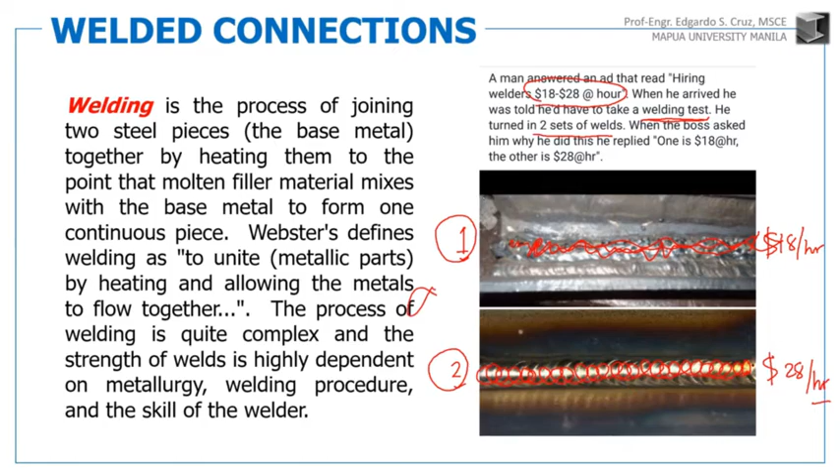We have different welding processes. The most common welding process that we adopt here in the Philippines is SMAW, Shielded Metal Arc Welding.

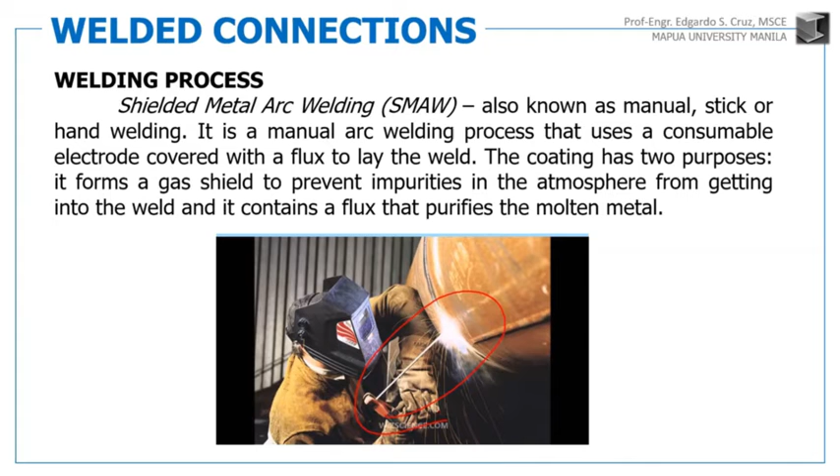This is the typical one with a welding rod. It's touched onto the base metal and it burns. The welding rod gets formed or converted into weld metal. So what we'll be analyzing later is the capacity of the weld metal, the burned electrode. The welding rod, that's the electrode. So when you touch it to the base metal, it cooks, it burns, and then it sticks onto the base metal. What sticks onto the base metal is called the weld metal. So the weld metal is what we analyze in terms of its strength.

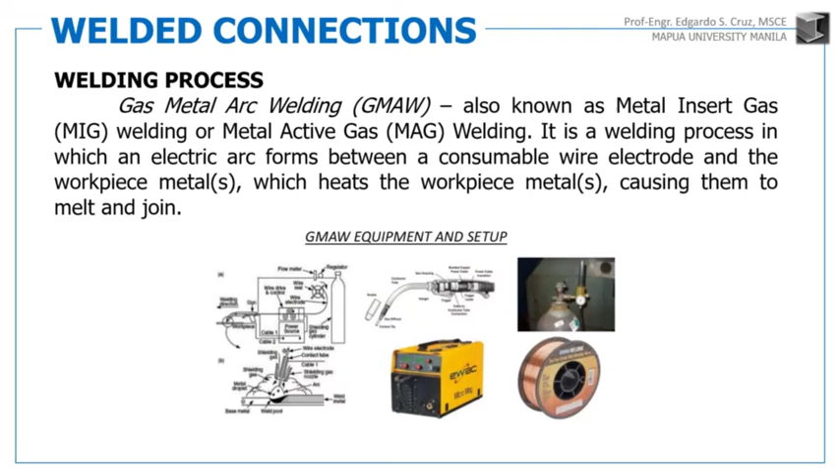Not to mention, we have other possible processes of welding. We have GMAW, gas metal arc welding, as well as flux core arc welding, and submerged arc welding, SAW. These different processes require higher technology in the welding process.

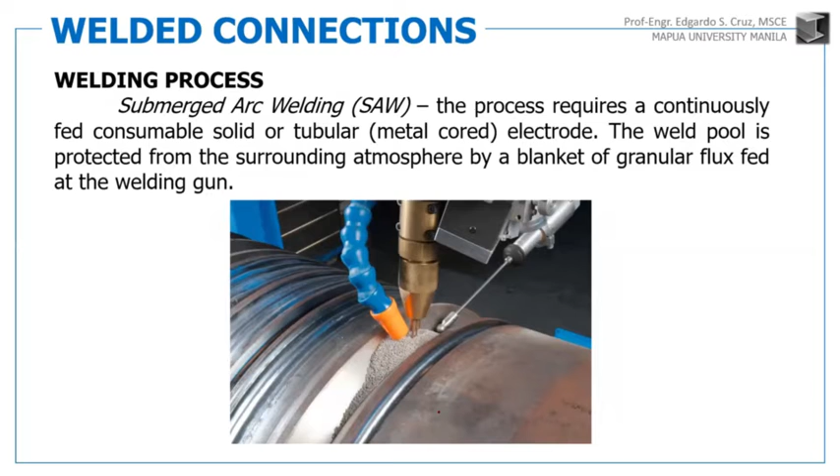If you want to convert that to megapascals, just multiply it by 6.9. That becomes the tensile strength of the electrode, of the weld metal. For E70, it's 70 KSI. For E80, it's 80 KSI.

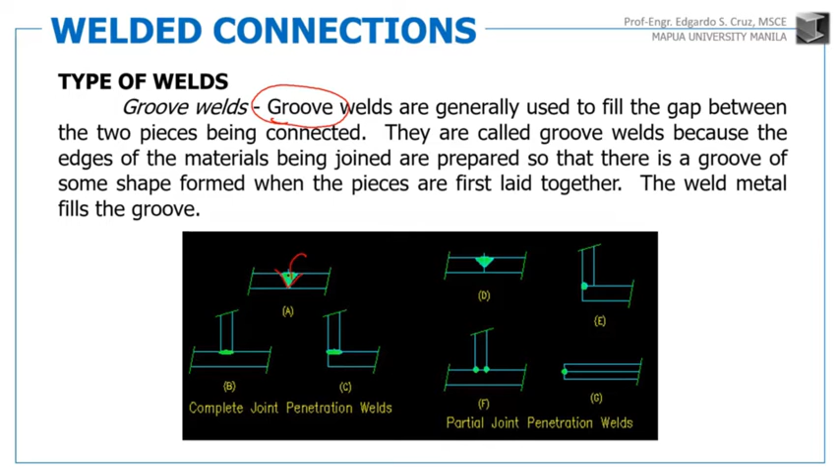But the most commonly used type of weld is the fillet weld, which usually isn't placed in a carved groove. It's typically placed at corners - it could be placed here, here, at the corner, or here.

So take note of the parts of the fillet weld. These are the parts of the fillet weld, take note of that.

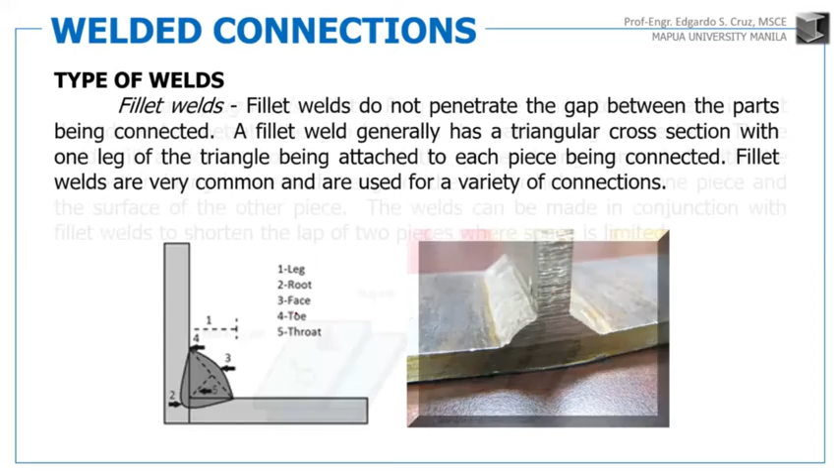We have slot and plug welds. These are done like you have a hole, then you fill in the hole with weld, so it becomes like a lock, like a shear key effect.

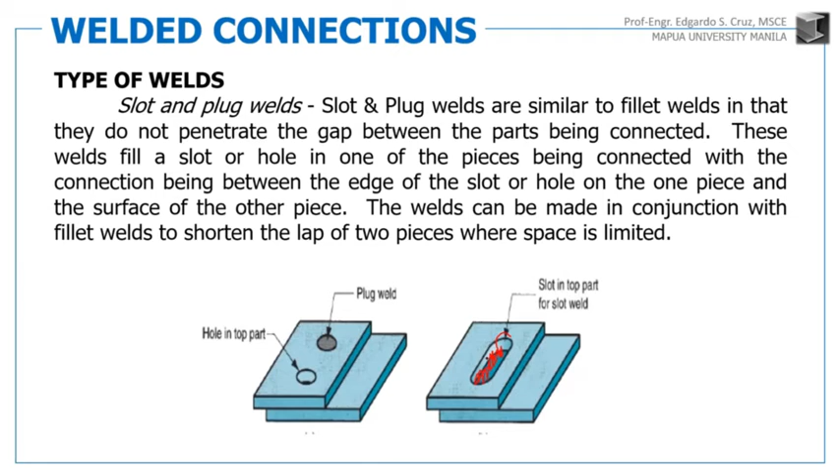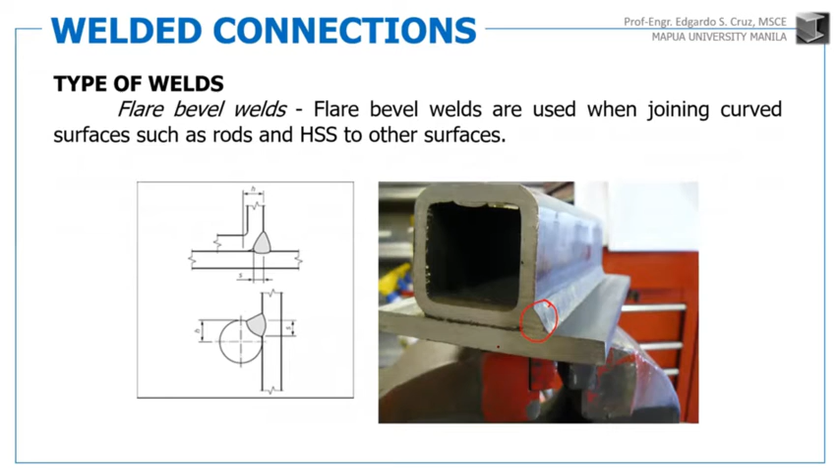Flare bevel welds are used when you connect tubulars or hollow pipes, at a certain split. That's the bevel welds.

Okay, so how do we analyze? Now let's move into welded connections. For welded connections, the main limit state is shear.

So we have to identify the design shear strength per unit length of fillet weld. Again, the design strength φRn should be greater than or equal to Ru. The resistance factor for welded connection, as well as bolted connection, is also 0.75.

The design shear strength for welded connection is given by this, with 0.75 as the resistance factor. So basically Rn for welded connection is given by 0.707...

...times W times FnW. FnW is the shear strength. Is it defined? Yes, it's the weld ultimate shearing strength, FnW.

So how was this formula derived? Again, Rn equals 0.707 times W times FnW. How was that derived? Let's look at the shear strength of the fillet weld.

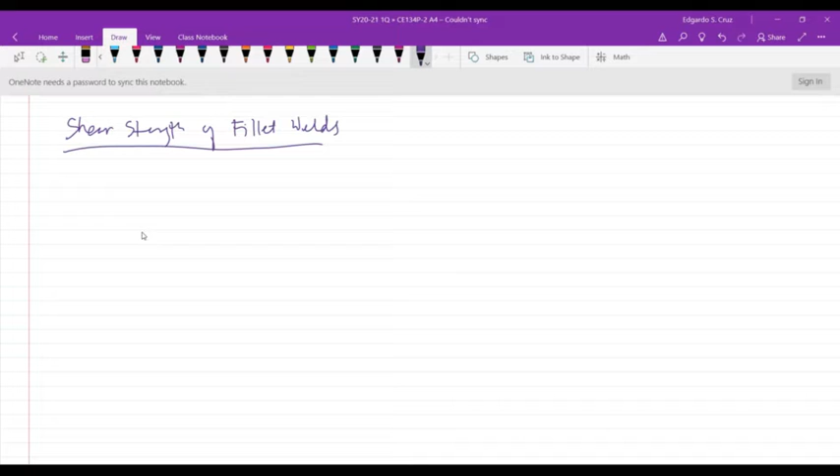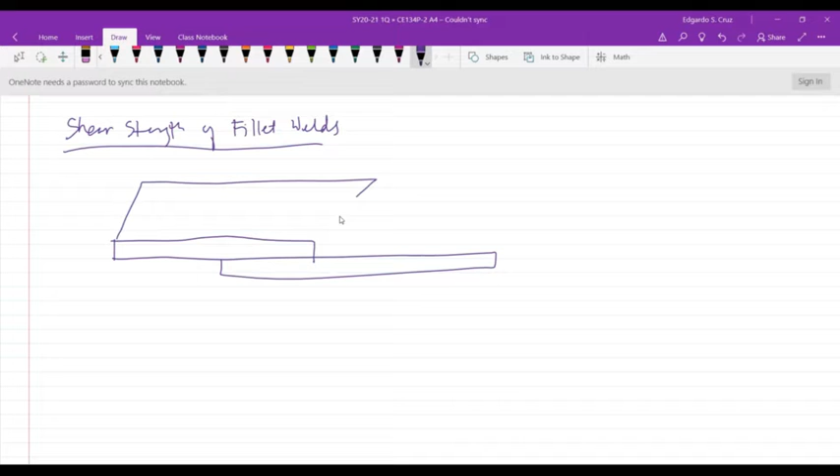Let's take a look at a single lap joint. Say you have this single lap joint, applied with Rn, the tensile load.

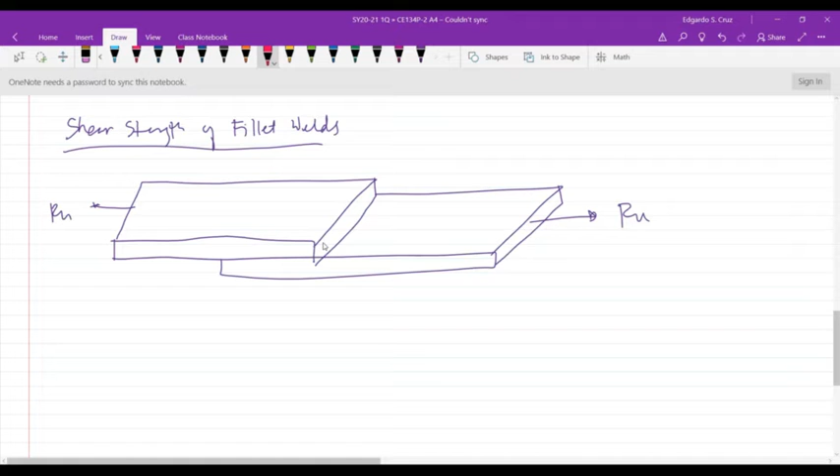Instead of drilling holes, I'll connect the two plates using welds. So I'll place a fillet weld here, at the corner, and another fillet weld at the other corner.

This would be the length of the weld, the weld length, L. Now if you take a look at the cross-section, what does the cross-section of the fillet weld look like?

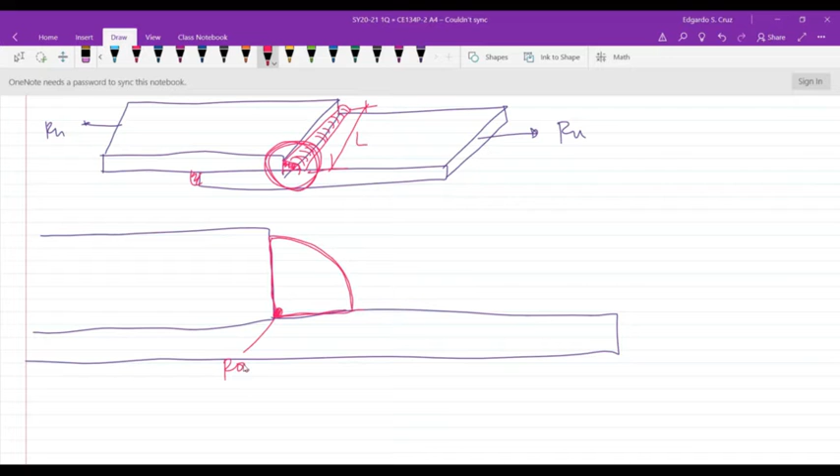Let me identify the parts. This corner here is called the root of the fillet weld. Then this surface is called the actual face, the actual surface or actual face of the fillet weld.

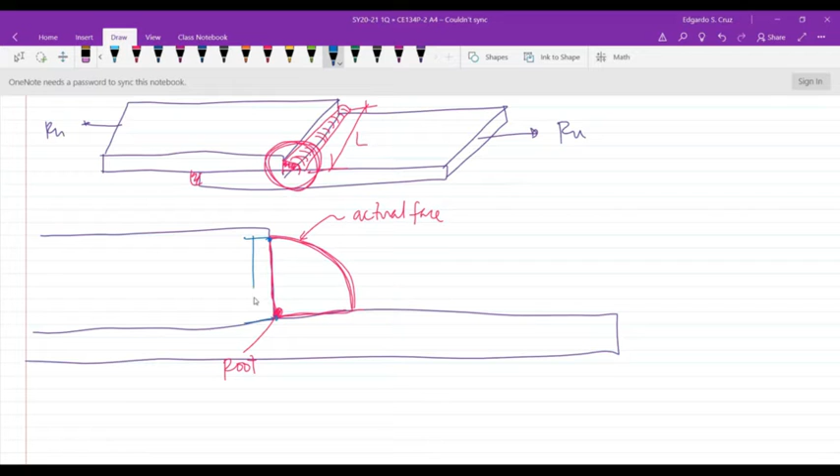This dimension, the distance from here to the root, is the leg of the weld. This is also a leg of the weld. So this is the length of the legs of the weld, W, the length of the legs of the fillet weld. Sometimes this is also known as the size of the fillet weld.

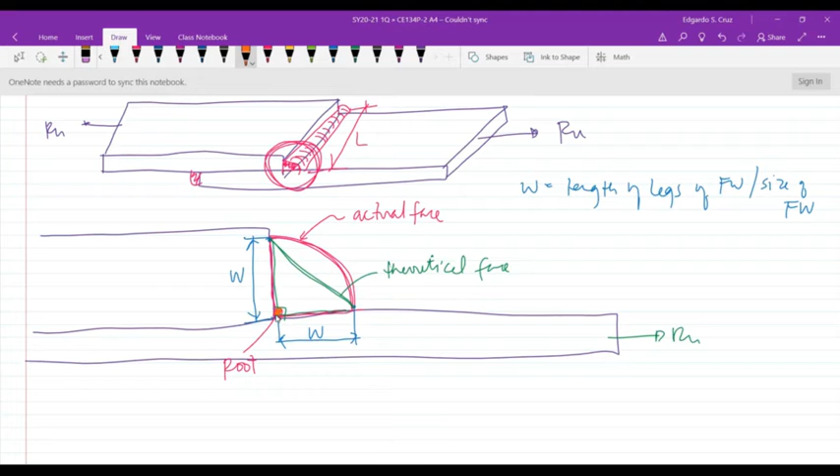So this means the cross-section of the fillet weld becomes an isosceles right triangle. And when you pull it, the fillet weld would fail against shear. When it fails against shear, the shear failure comes from the root and propagates toward the theoretical face.

And of course, the most critical would be the shortest distance, and the shortest distance is always the perpendicular distance. That shortest distance is known as T, the throat. Not thickness, T is for the throat of the fillet weld.

Since this is an isosceles triangle, W equals the length of the legs, and the angle is 45 degrees.

So if I solve for it, Rn would be FnW times the area for shear. FnW is the shear strength, which is 0.6 of the electrode used. For example, if your electrode is E60, the ultimate tensile strength is 60 ksi; take 0.6 of that, and that's the shear strength, FnW.

Now what is the area for shear? The area of shear is the throat times the length of the weld. Imagine the throat multiplied by the length perpendicular to the screen, forming a rectangle. That's the sheared plane or sheared area that occurs for fillet weld failure.

Most of the time, fillet welds are expressed in terms of its size W. So how would I correlate throat T in terms of W?

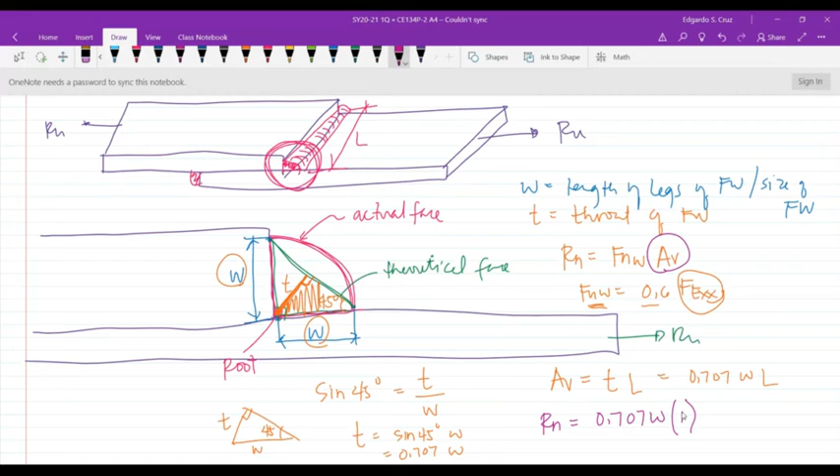Kaya ito ay naging 0.707 W times L. So substituting everything back sa equation, our Rn becomes, ano yung AV? AV is 0.707 W times L. L is unit length. Sabi kanina, we are analyzing per unit length, 1 millimeter length of weld, times FNW. So dyan nanggaling yung RN equation natin.

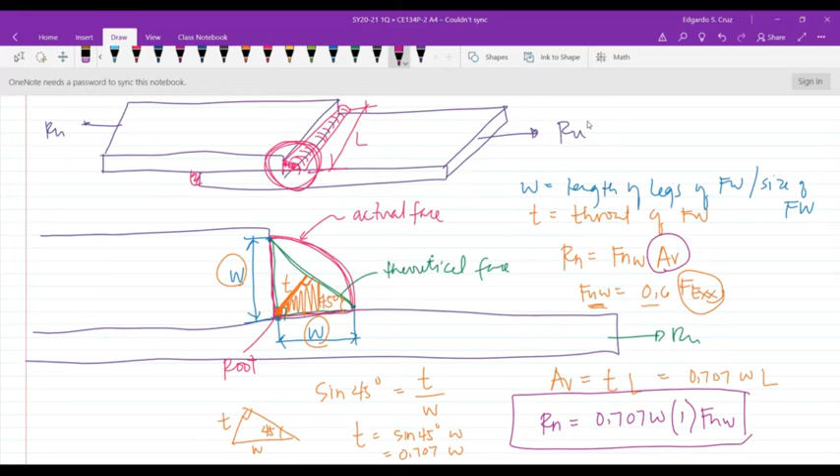Then you just have to check lang. So again, these are the values of the electrodes, depende sa electrode na gagamitin. I just converted it to megapascals. Tapos kuhain mo lang yung 0.6 niyan. Pag nakuha mo yung 0.6, yun na yung FNW na gagamitin mo rito sa formula ng RN.

You have to check the base metal shear, kasi minsan mas humihina yung pinaka-pinagwewelding mong bakal kumpara dun sa weld metal. So you have to check the shear yielding strength by solving this design strength. At the same time, yung shear rupture strength ng bakal by solving its design strength here. You just have to compare itong ΦRn ng weld metal with the ΦRn ng base metal shear, kasi baka mamaya mas gumina yung strength ng base metal.

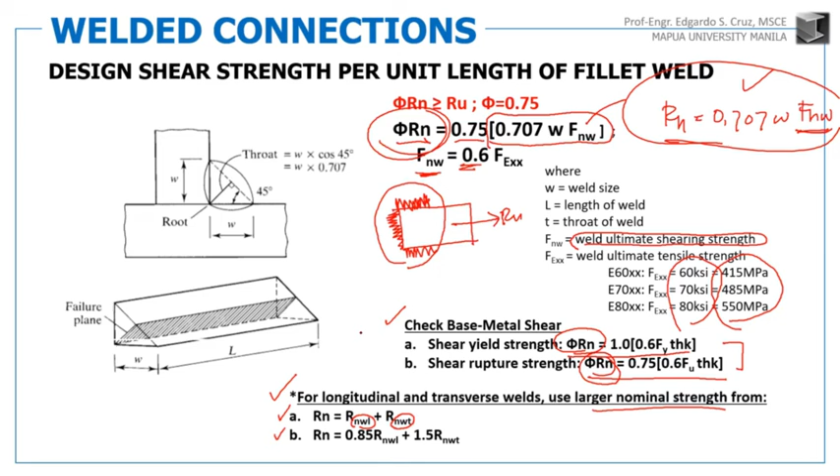Kapag yung weld mo is combination ng longitudinal and transverse, ito yung pinaka-plate mo, tapos kunwari may welding ka rito, dito yung force, yung RU, yung welding dito ang tawag longitudinal. Tapos yung welding dito rin, longitudinal. Tapos paano kung may welding din dito? Transverse. Kapag yung welding mo is combination siya ng transverse tsaka longitudinal, you have to check it with this provision. Use the larger nominal strength from A or B. Yung RNWL is for the longitudinal, tapos yung RNWT is for the transverse. So you just have to solve for these values of Rn, and whichever is larger, yun na yung magiging Rn nung combination of longitudinal and transverse welds.

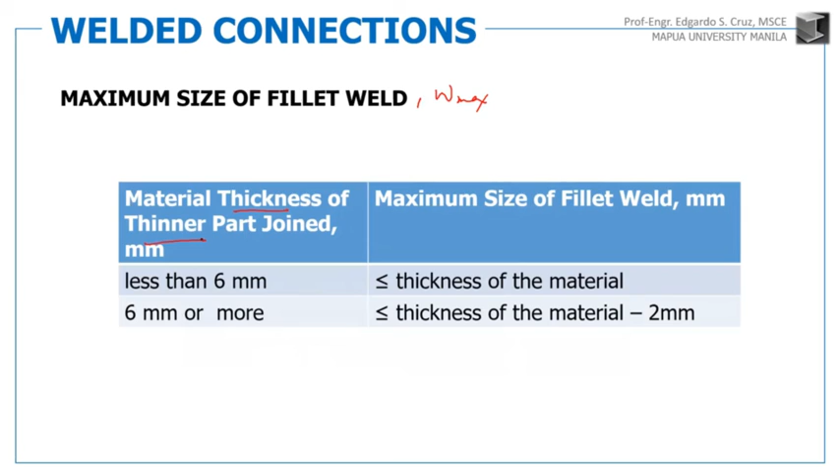Kung may minimum size tayo, meron din tayong maximum size. Again, the maximum size of the fillet weld, W max naman ang tawag dyan, ay depende ulit sa thickness ng mas manipis na ikinakabit mong bakal. Kapag manipis siya in such a way na ang thickness ng thinner part is less than 6 mm, the maximum size would be the thickness of the material. Kapag yung thickness ng mas manipis mong plate is 6 mm or more, the W max would be the thickness of the material, babawasan mo ng 2 mm. Yung 2 mm na yan yun para ma-sure na pagka nag-welding ka, meron siyang clearance.

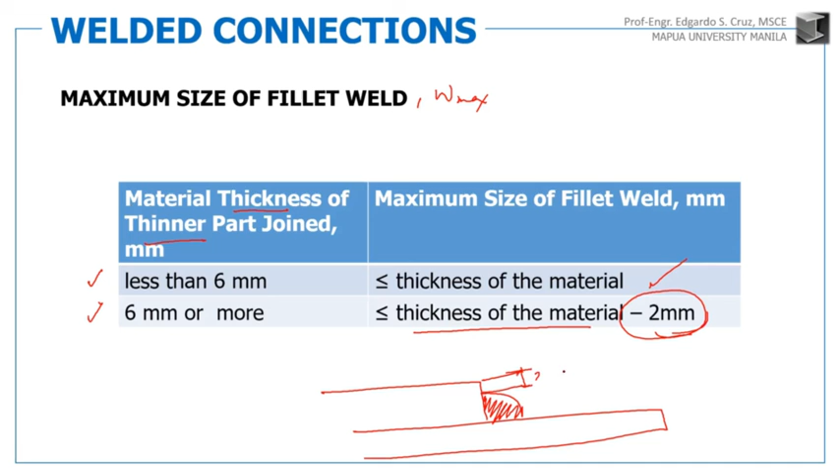Ito yung pinaka-welding na yung nilalagay mo. Dapat pagka nag-welding ka, wag mong pupunuin, wag hanggang sa ibabaw. Dapat may clearance ka rito na at least 2 mm. Okay, so yan yung ibig sabihin ng code na yan.

Okay, so yung tawag doon ay end return. So ayun, that would be the provisions that we have to follow when it comes to welded connections.